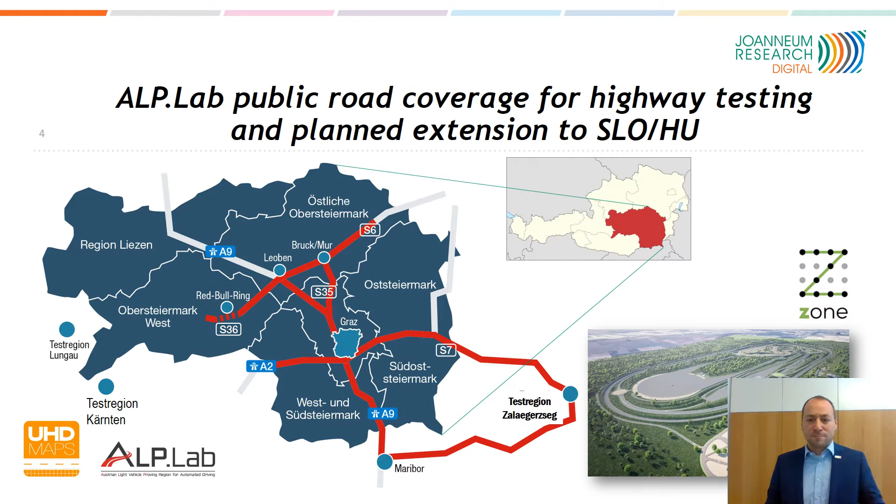First, we defined the requirements for those maps we need within ALP.Lab. There are qualitative requirements like 100% completeness of all the map features, and they have to be 100% correct because we want to use them as a source of static ground truth. According to the accuracy, we wanted minimum plus minus 5 centimeter absolute positioning accuracy in world coordinates.

The features we want to include are the road geometry, so the slope and elevation, the camber, the whole elevation profile of the road, and the road topology is very important. Then we have road markings, traffic signs, and also all the constructions on the road or on the side of the roads, like noise barriers, jersey barriers, guardrails. Those things are very interesting when it comes to sensor simulation, by the way.

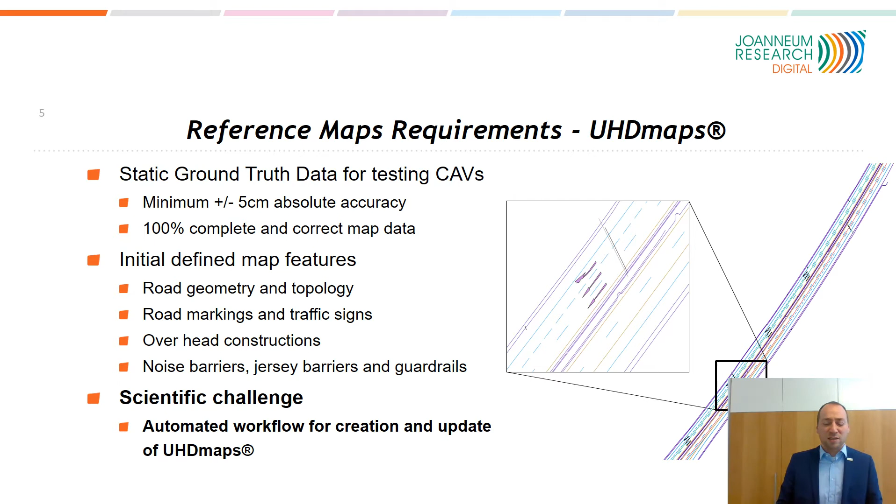As we are a research organization, we also have a scientific goal: we want to produce these Ultra HD maps, as we call them, in an automated workflow, to make it a scalable process which is cost and time efficient to keep it up to date.

Here is our process. We start in the upper left corner with this image of our mobile mapping system. This is a survey-grade sensor system with two laser scanners and several high-resolution cameras to produce a very dense and very accurate point cloud. So this is not comparable to technology you have in ADAS vehicles. This is survey-grade technology. After processing, you end up with this point cloud data. And then the first thing we do to be GDPR compliant is the anonymization.

We do this automatically. Again, we detect number plates and faces, and we anonymize the data before the data is used in the lab. The next thing is that we use our AI detectors to recognize all the relevant infrastructure on the road and do the automatic labeling within our digital twin. From this, next, we can deduce just the vector information to produce the maps needed for road testing.

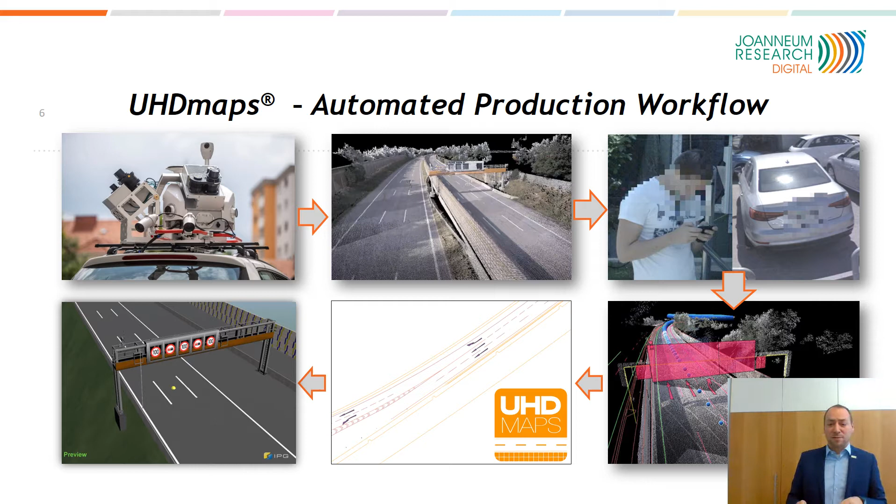So this now is the point cloud data we are producing, which is very accurate, very dense, but I think all of you have seen a lot of point clouds in the past, so let's go on to the next slide. Here are examples of our detectors which we developed in cooperation with the Technical University of Graz. On the left side, you see that we are recognizing the road markings. In the middle, we are recognizing the traffic signs. And on the right side, what you maybe see not that often is recognition of the noise barriers.

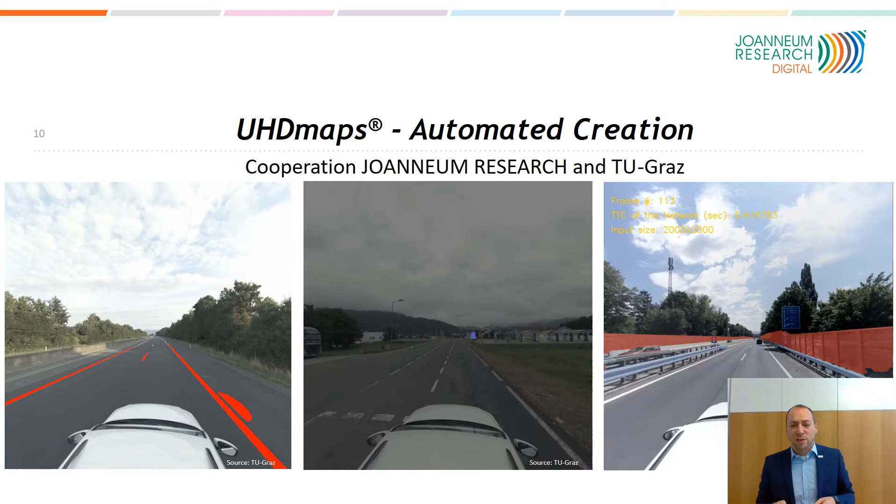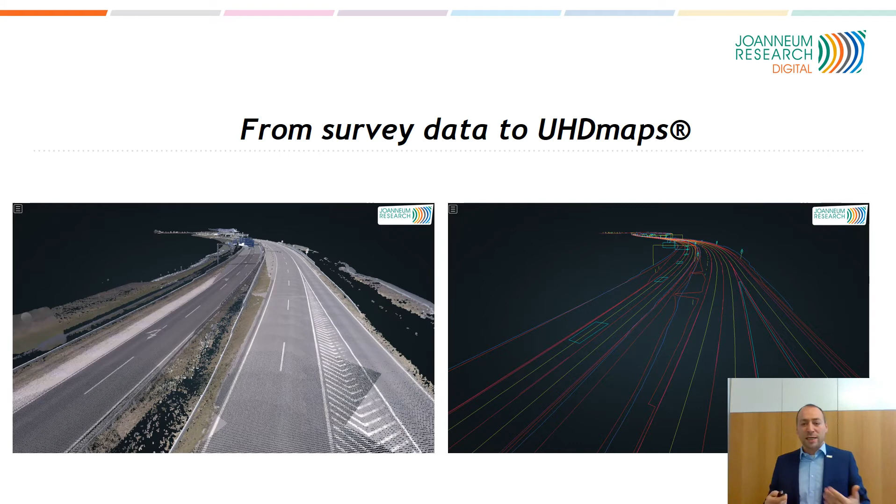And we are not only detecting them, we are also doing the georeferencing of this data. So we are deducing all the boundaries of each lane marking on the ground or boundaries of traffic signs and have this in geo world coordinates with ±2 centimeters accuracy. And then we put this in our map. So on the left side, you see the mobile mapping data. This is the point cloud, the textured one here. And on the right side, you see what we end up with after using our detectors. So we get all the map features we need for our Ultra HD maps.

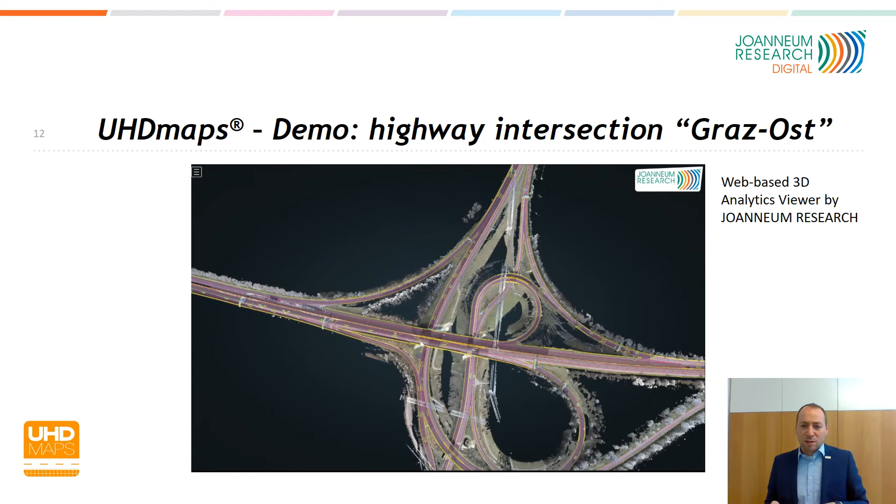Well, and here I can show you an example of a highway intersection next to Graz. So this is a web-based analytics tool which we developed on our own. So we're just zooming in now to this point cloud data, and you see we have already overlaid the Ultra HD map, which is fitting correctly, of course, to our data. We have lane markings, we have all these arrows on the ground, and you can zoom in, you can go around, you can measure, you can see any detail. Also, of course, here you see the guardrails, that's very interesting.

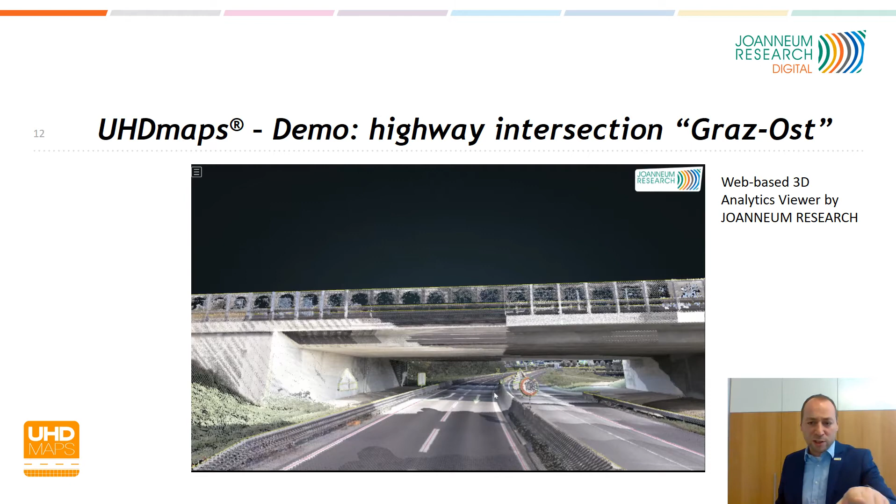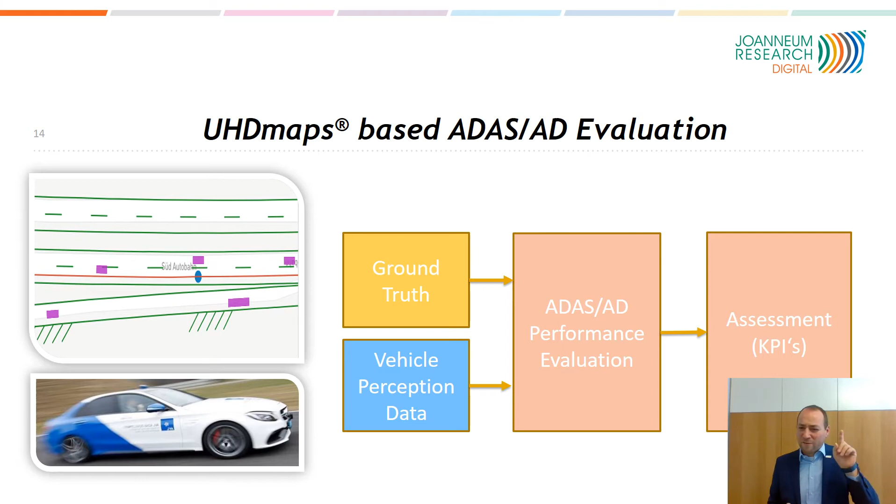Well, now the question is, where do you get this ground truth data from? So, I start on the left side. What we've seen before about the Ultra HD maps. So this is what we call static ground truth. It's what is really there, but is not moving. It's all in the map, all the things in the map. Secondly, we need dynamic ground truth. So all the vehicles moving around our ego vehicle. And how can we collect this data?

First approach is, we have a reference sensor box, which was developed on our own. You can put it on the roof of the vehicle, with survey-grade sensor quality to survey the environment. And in the post-processing phase, we can do the processing of the data to find out all the objects around you.

And secondly, we have another source on our highways in the frame of ALP.Lab. We have also infrastructure sensors like radar, laser scanners, cameras, which are watching all the vehicles on the road and classifying them, and we know the trajectories of them, of course, and this is also used for dynamic ground truth data.

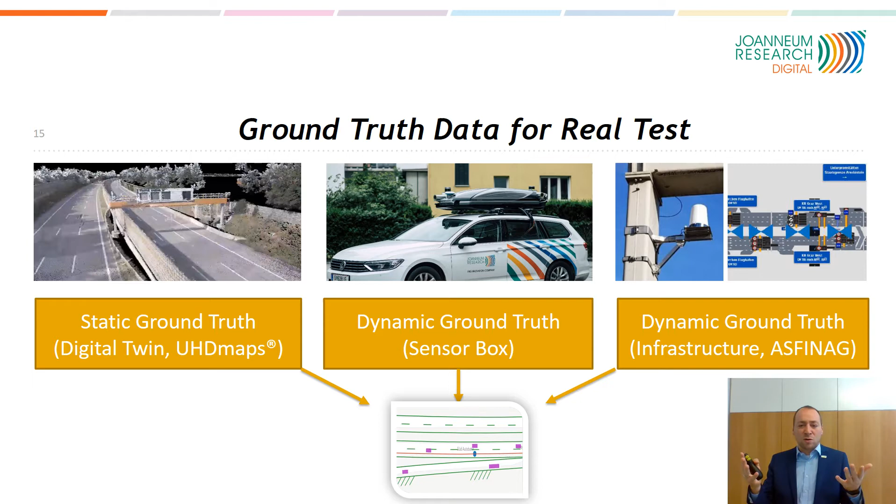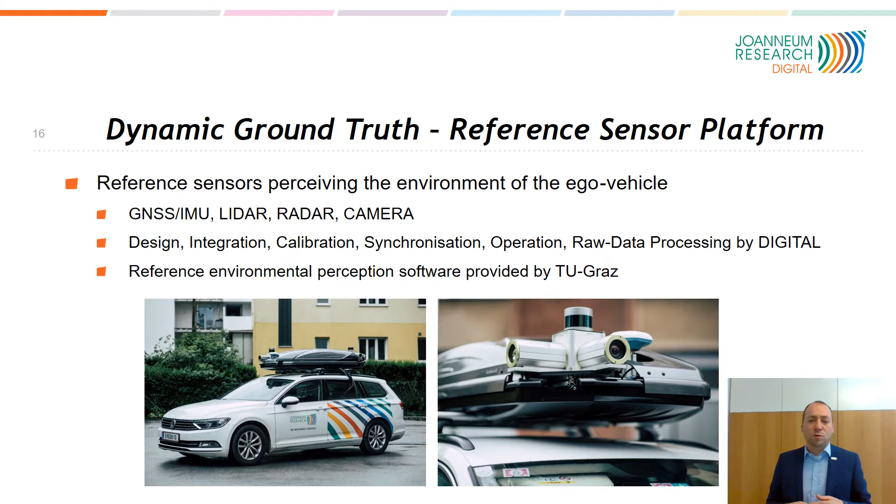Well, here are also pictures of our reference sensor platform with a dynamic ground truth platform. We include LiDAR, IMU, radar, camera sensors. JOANNEUM Research is putting this all together, integrating the sensors, doing the calibration, the synchronization, the operation, all of this. And then our partner, Technical University Graz, is supporting us with the environmental perception algorithms.

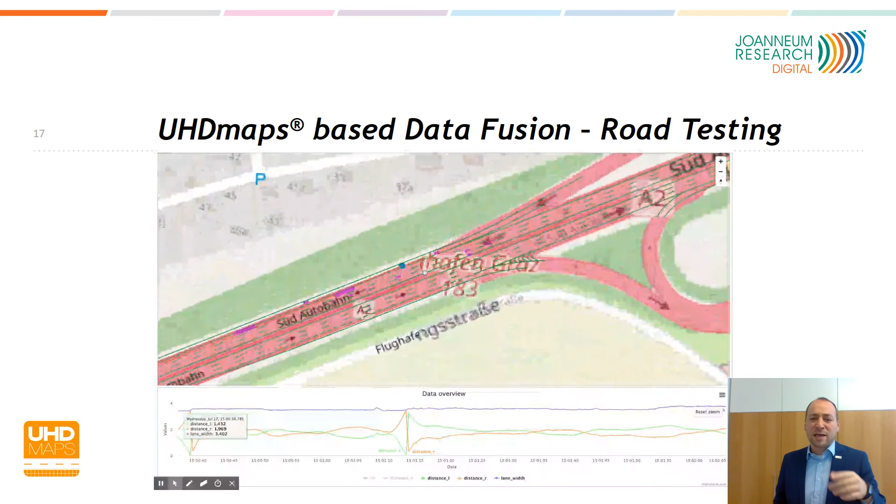Well, what you see here is another analytics viewer of ours, web-based, so you can zoom in, and there you can already see a fusion of static ground truth data and dynamic ground truth data. This is very interesting. So after your test drive, you're back in the lab, and then you can see exactly what we see here. You have a red line, it's the trajectory of the ego vehicle. The blue dot is the position of the vehicle, and for each position of this ego vehicle, you can see all the cars around with these bounding boxes you can see here.

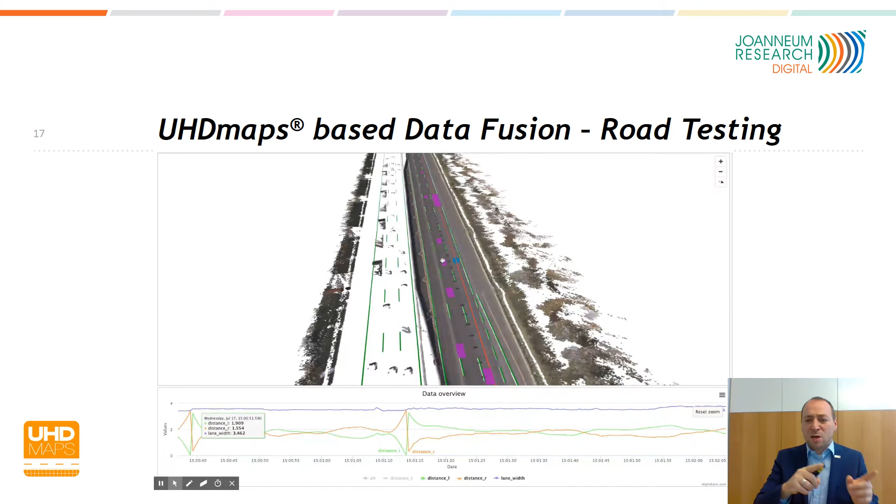And this is amazing what you can do with it, because this is fused ground truth data, and now you can compare what the car has seen with what we have here in our ground truth analytics viewer. Well, and here are just some examples. On the left side, automatically in a scalable software process, we do a comparison. What has the vehicle seen and what is the ground truth data when it comes to perception? So have you detected all the cars around you, classified them right, was their position right, and so on.

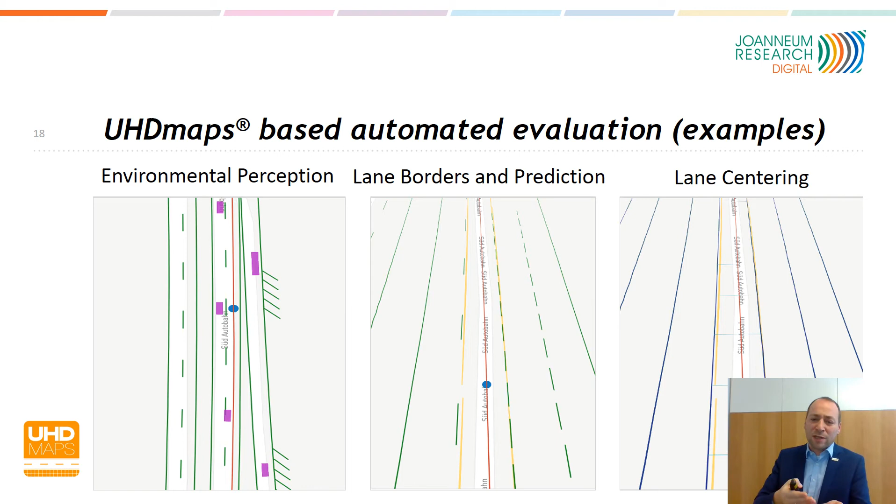And in the middle you see, it is very interesting. I hope you can see the yellow lines. This is from a Mobileye camera, the lane detections and the lane predictions from the Mobileye camera, and you can put it on top of the UHD map, and then you can calculate automatically your KPIs, how well it was fitting to the real lane borders. On the right side, easy example, it's lane centering, but you can automatically calculate over thousands of test kilometers how the performance of your lane keeping or lane centering was, in centimeter accuracy.

Well, finally, after all this road testing, I also want to show you that you can use Ultra HD maps for simulation as well, of course. Here are some examples. So when you have these vector maps from us, you can go to simulation programs like here IPG CarMaker, which has its software libraries with 3D objects, and then those objects are put exactly in the right position and the right scale, and it produces this 3D visualization, which is very close to the real environment. So every painting on the road is exactly the same as on the real roads. And then you can run the simulations you want, very realistic simulations in that case.

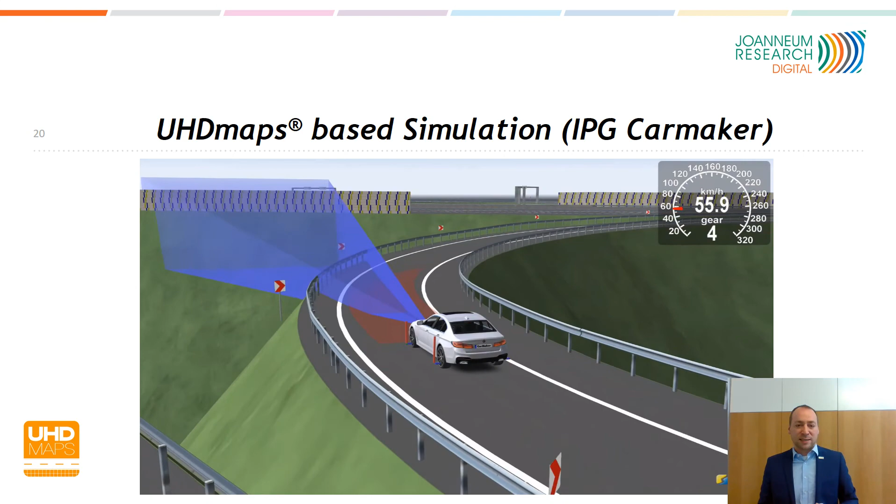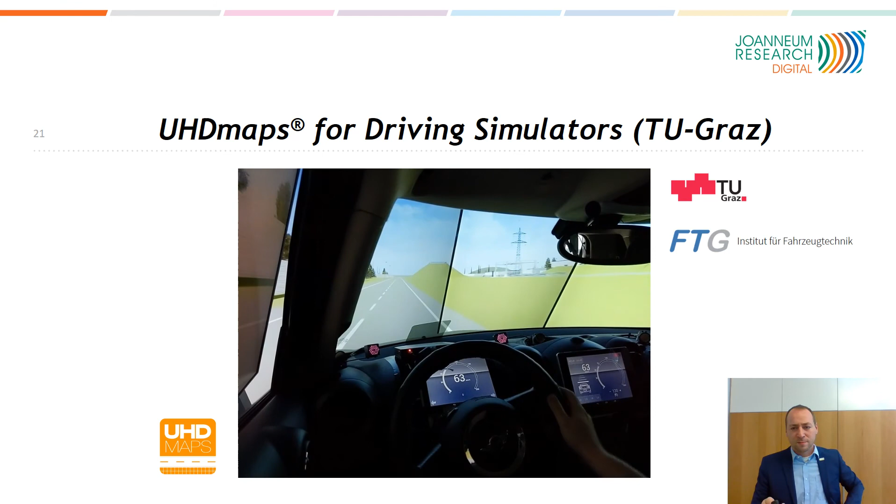So, and finally, I want to show you this. What we are actually working on is sensor simulation. That's the use case where you need really accurate, really dense 3D reconstructions, because you work with ray tracing methodologies, and you need to know the shapes of all the objects and the materials and the textures to calculate the reflections, the scattering, or the absorption of signals.